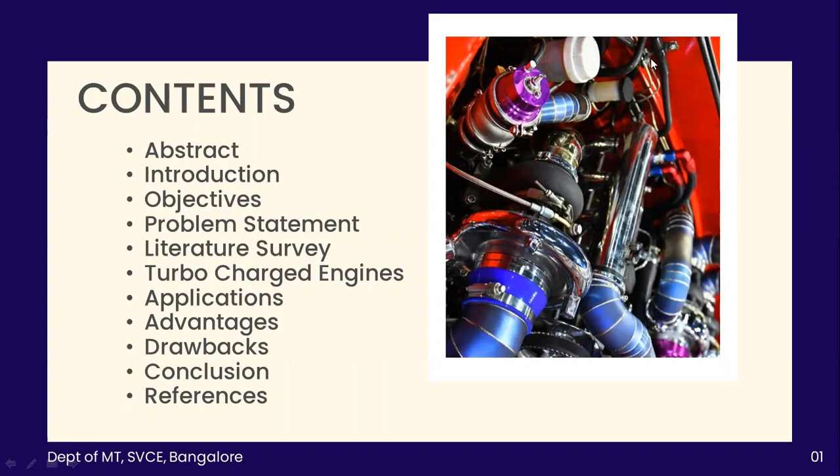First is the abstract. Turbocharged engines have become increasingly popular in the automotive industry due to their ability to increase horsepower and torque while also improving fuel efficiency. This seminar provides an overview of how turbochargers work and the different types of turbochargers, as well as their applications in high performance cars, trucks, and motorcycles, as well as in diesel engines.

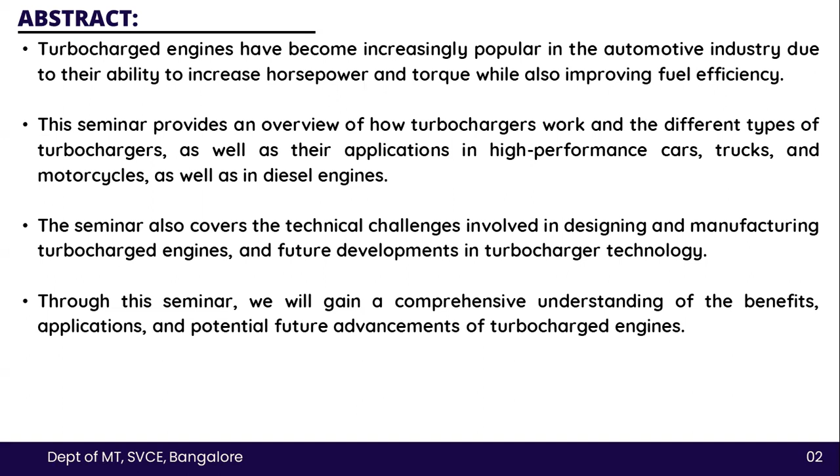The seminar also covers the technical challenges involved in designing and manufacturing turbocharged engines and future developments in turbocharger technology. Through this seminar, we will gain a comprehensive understanding of the benefits, applications, and potential future advancements of turbocharged engines.

Introduction to turbocharged engines. Turbocharged engines have become popular in the automotive industry due to their ability to increase engine performance while also improving the fuel efficiency. A turbocharger is a device that compresses the air that enters the engine, allowing it to burn more fuel and create more power. The result is increased horsepower and torque, as well as improved fuel economy.

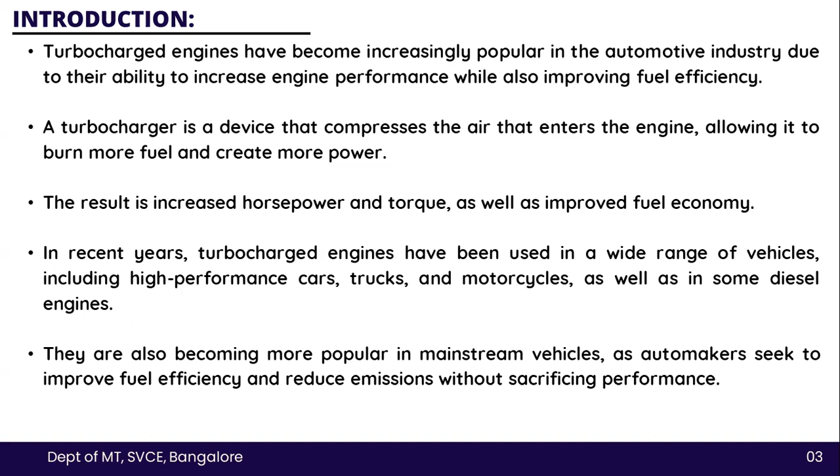In recent years, turbocharged engines have been used in a wide range of vehicles, including high performance cars, trucks, and motorcycles, as well as in some diesel engines. They are also becoming more popular in mainstream vehicles as automakers seek to improve fuel efficiency and reduce emissions without sacrificing performance. The objectives: to explain the basic components of a turbocharger and how it works to increase engine performance

and fuel efficiency. To provide an overview of the different types of turbochargers and their applications in various types of vehicles, including high performance cars, trucks, and motorcycles, as well as in diesel engines and emerging applications in mainstream vehicles. To highlight the advantages and disadvantages of using a turbocharged engine, including the technical challenges involved in designing and manufacturing them, such as heat management and durability.

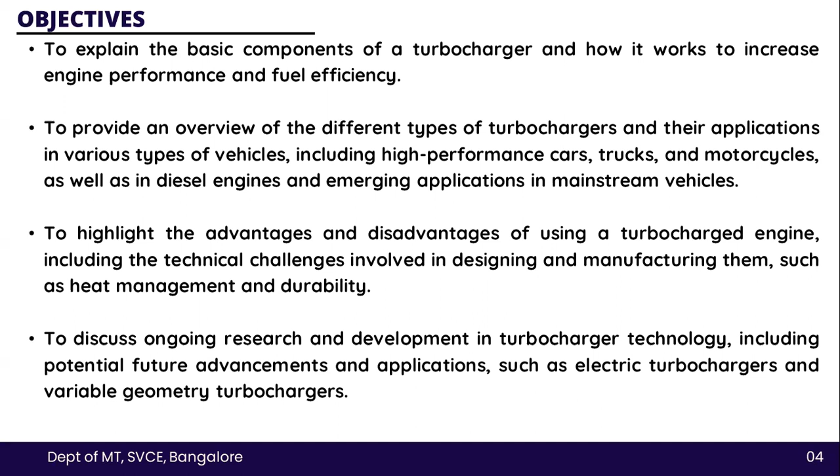To discuss ongoing research and development in turbocharger technology, including potential future advancements and applications, such as electric turbochargers and variable geometry turbochargers.

Now, what are the problem statements? So, while turbocharged engines offer many benefits such as increased horsepower and torque and improved fuel efficiency, they also present several technical challenges for the designers and manufacturers. These challenges include heat management, durability, and maintaining proper air to fuel ratios. Additionally, the increased complexity of turbocharged engines can make them more difficult and expensive to repair and maintain.

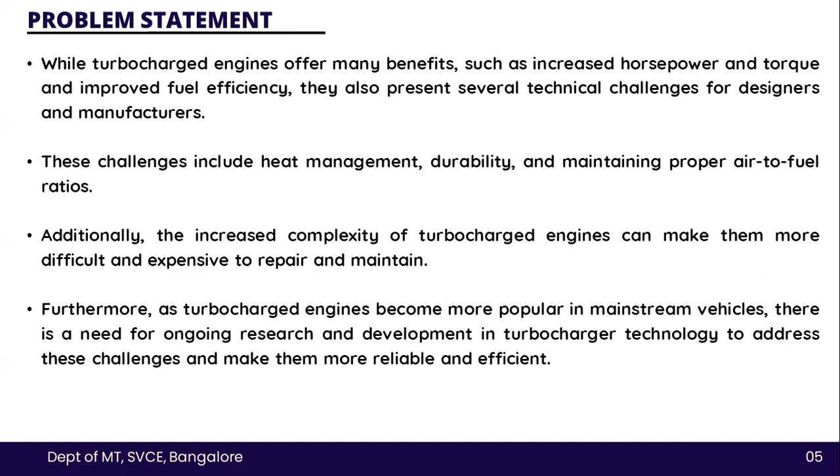Furthermore, as turbocharged engines have become more popular in mainstream vehicles, there is a need for ongoing research and development in turbocharger technology to address these challenges and make them reliable and efficient. These are the papers referred to in making the PPT on this topic.

The first paper is by the author M. A. El-Sayed. This paper was published in the year 2017. The title was given as A Review of Turbocharger Technologies. This paper provides a comprehensive review of the different types of turbocharger technologies, including fixed geometry, variable geometry, and electric turbochargers.

The second paper was published in the year 2018 by CM Baines and RWA Howlett. The title was given as Turbocharging the Gasoline Engine: Evolution or Revolution. This paper explores the history and current state of turbocharging in gasoline engines and discusses the challenges and opportunities for future developments.

The third paper was published in the year 2018 by SM Al Zubaidi, MY Hassan, and H.A. Aziz. The title was given as Turbocharger Matching for Engine Performance Improvement. This paper presents a method for optimizing the matching between a turbocharger and an engine in order to achieve maximum performance and efficiency.

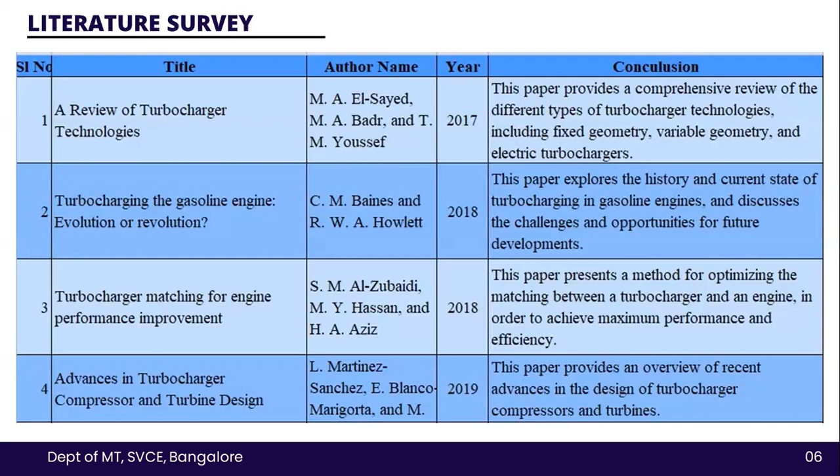Turbocharged engines. Turbocharged engines use a turbocharger to increase the amount of air that is delivered to the engine. The turbocharger is a device that uses exhaust gas energy to drive a compressor that forces more air into the engine cylinder. Turbocharged engines are widely used in a variety of applications, from passenger cars and trucks to high performance racing vehicles and heavy duty industrial equipment.

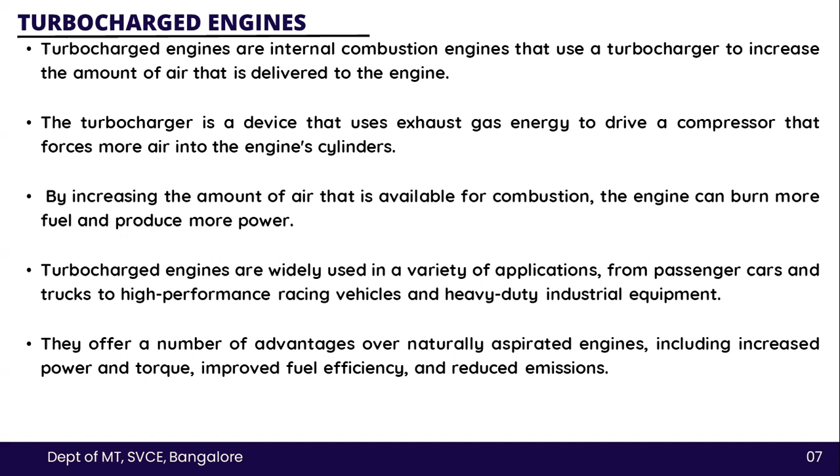Basically, turbocharged engines are internal combustion engines that use a turbocharger to increase the amount of air that is delivered to the engine. It can also be defined as a device that uses exhaust gas energy to drive a compressor that forces more air into the engine cylinder. By increasing the amount of air that is available for combustion, the engine can burn more fuel and produce more power.

Working of a turbocharged engine. The working principle of turbocharged engines can be seen with the use of a turbocharger, which is a device that utilizes exhaust gas energy to drive the compressor. The compressor forces more air into the engine cylinder, allowing for more fuel to be burned and more power to be produced.

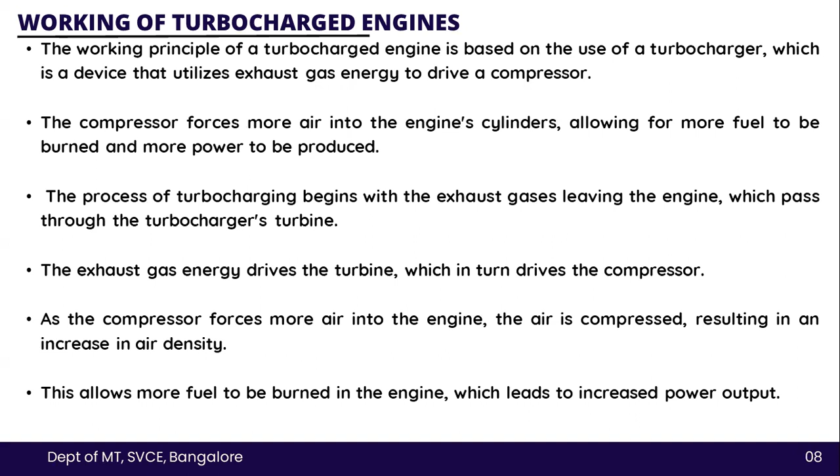The process of turbocharging begins with the exhaust gases leaving the engine, which pass through the turbocharger's turbine. The exhaust gas energy drives the turbine, which in turn drives the compressor. As the compressor moves, it forces more air into the engine; the air is compressed, resulting in an increase in air density. This allows more air and fuel to be burned in the engine, which leads to increased output.

So, as you can see, this is a video, and here it shows the working of a turbocharged engine. The compressor inlet is the inlet for the air to pass, and from the inlet it goes into the compressor discharge, where the discharge of the air is taking place, and the air cooler is set to cool the engine. The intake manifold of the turbocharged engine is seen here.

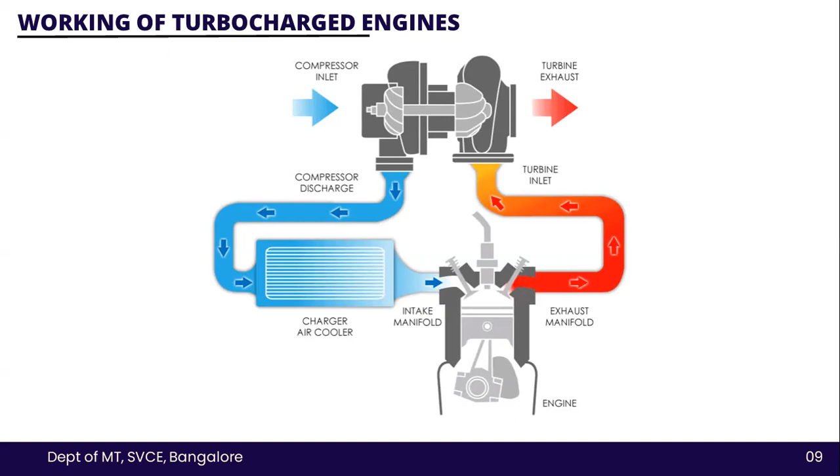While the valve opens, the air is pushed inside, and the exhaust manifold is the outlet air, and the exhaust turbine exhaust is the air outlet. The turbocharger operates at high speeds and temperatures and requires proper lubrication and cooling to ensure reliable and efficient operation. This is typically achieved through the use of engine oil and a dedicated cooling system.

One of the advantages of turbocharging is that it allows for smaller, more efficient engines to produce the same power as larger, naturally aspirated engines. This leads to improved fuel efficiency and reduced emissions as well as increased performance and acceleration.

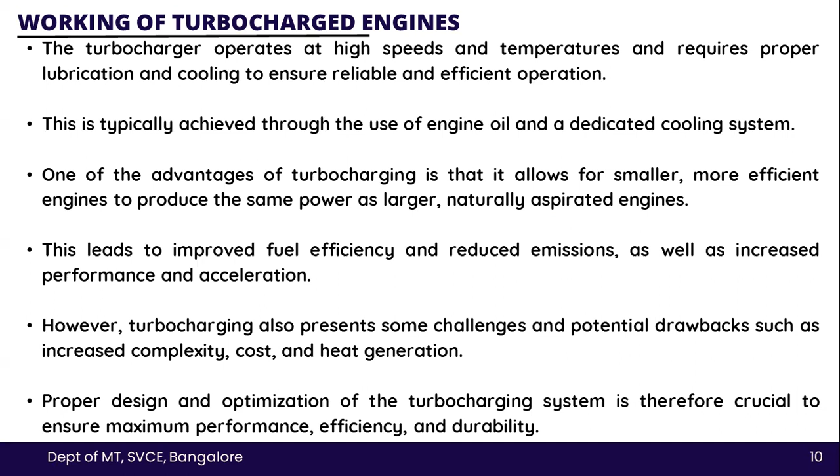However, turbocharging also presents some challenges and potential drawbacks, such as increased complexity, cost, and heat generation. Proper design and optimization of the turbocharging system is therefore crucial to ensure maximum performance, efficiency, and durability.

Now let's come to the components of a turbocharged engine. The first basic component of a turbocharged engine is a turbocharger. The turbocharger is the key component of the turbocharged engine, consisting of a turbine and a compressor that are connected by a shaft. Basically, the turbine is driven by exhaust gases from the engine, which in turn drives the compressor to deliver more air into the engine cylinder.

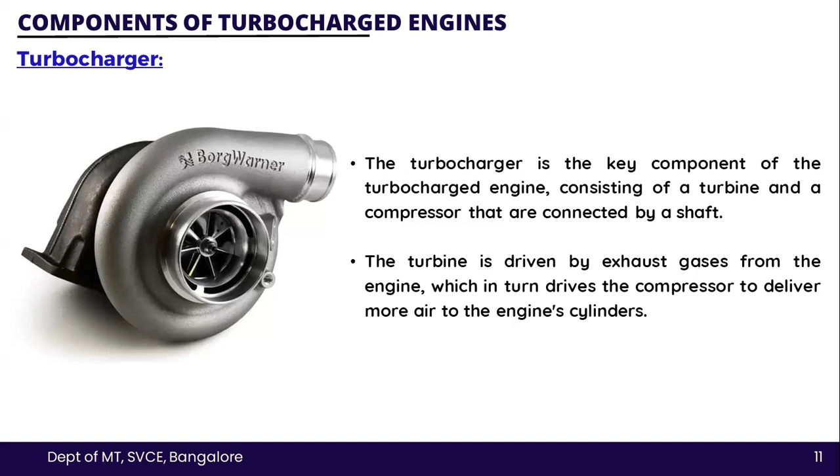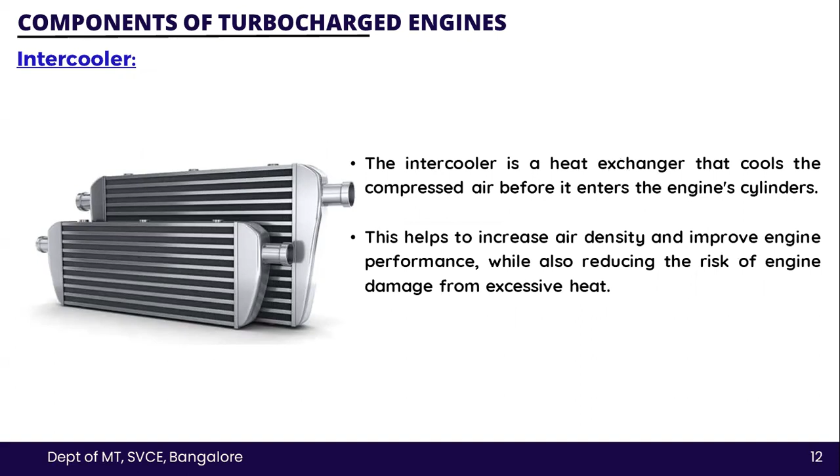The next component of the turbocharged engine is an intercooler. It is a heat exchanger that cools the compressed air before it enters the engine cylinders. This helps to increase air density and improve engine performance while also reducing the risk of engine damage from excessive heat.

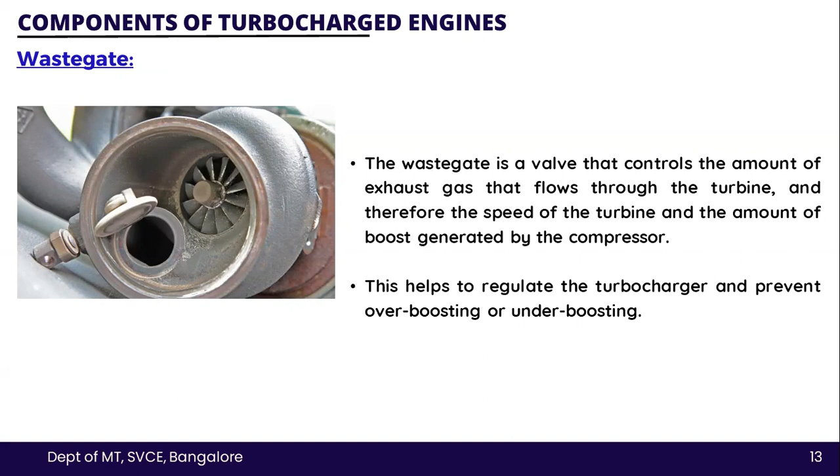Wastegate. The wastegate is a valve that controls the amount of exhaust gas that flows through the turbine, and therefore the speed of the turbine and the amount of boost generated by the compressor. This helps to regulate the turbocharger and prevent overboosting and underboosting.

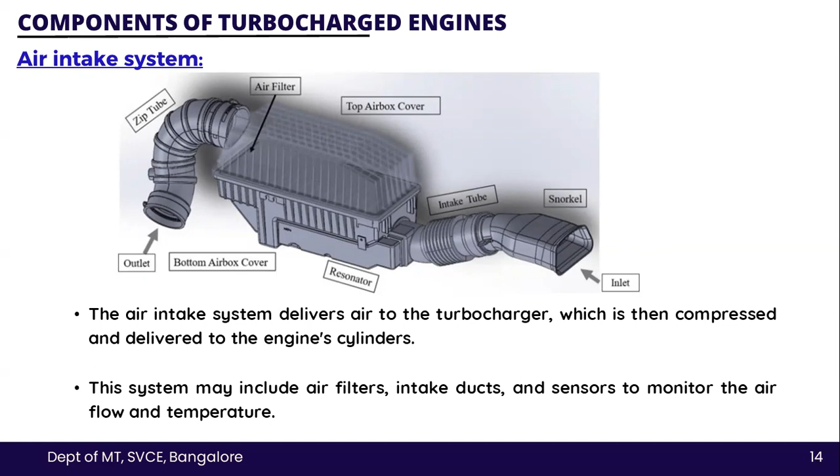Air intake system. The air intake system delivers air to the turbocharger, which is then compressed and delivered to the engine's cylinders. This system may include air filters, intake ducts, and sensors to monitor the air flow and temperature.

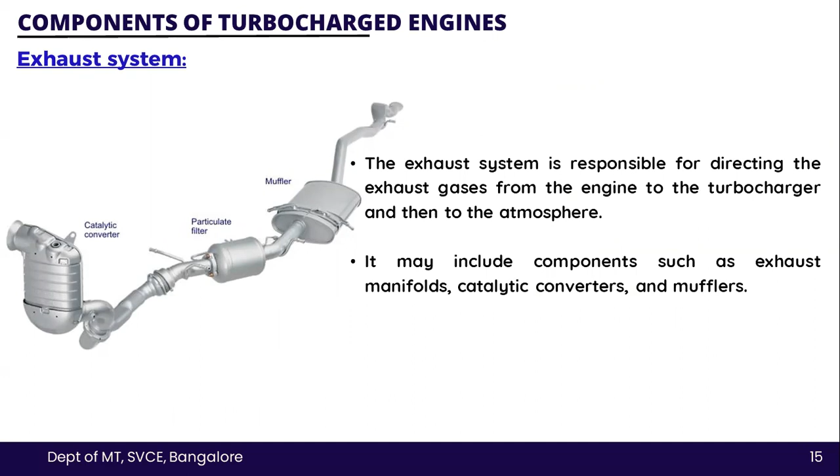Exhaust system. The exhaust system is responsible for directing the exhaust gases from the engine to the turbocharger and then to the atmosphere. It may include components such as exhaust manifolds, catalytic converters, and mufflers.

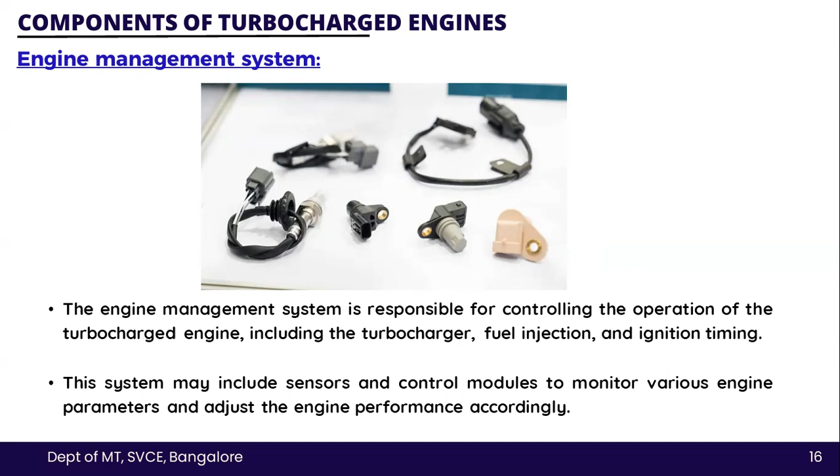Engine management system. The engine management system is responsible for controlling the operation of the turbocharged engine, including the turbocharger, fuel injection, and ignition timing. This system may include sensors and control modules to monitor various engine parameters and adjust the engine performance accordingly.

Now, let us see the types of turbocharged engines. The first is single turbo. A single turbo setup uses a single turbocharger to deliver increased airflow and power to the engine. This is the most common type of turbocharged engine as it is relatively simple and cost effective to implement. But single turbo setups may suffer from turbo lag and reduced performance at low engine speeds.

The next type is twin turbo. A twin turbo setup uses two turbochargers, usually of different sizes, to provide improved performance and responsiveness compared to a single turbo setup. By using two turbochargers, one can be optimized for low speed performance and the other for high speed performance, resulting in improved overall engine performance.

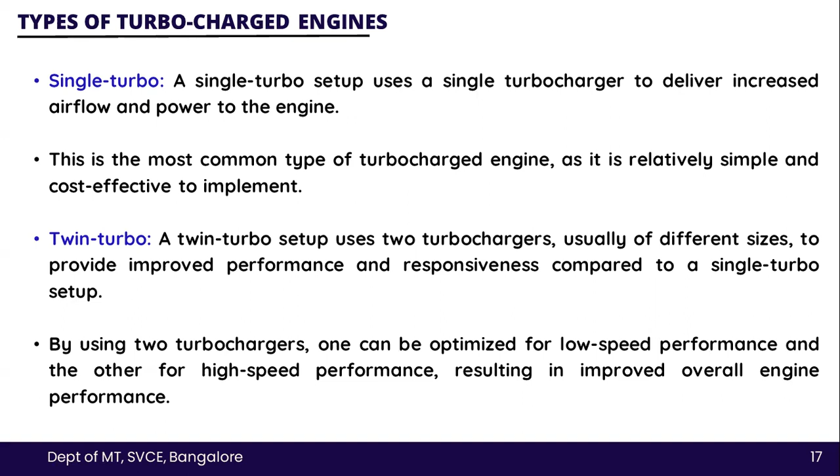The next one is sequential turbo. A sequential turbo uses two turbochargers, but they are used sequentially rather than in parallel. One turbocharger is typically smaller and optimized for low speed performance, while the other is optimized for high speed performance. The smaller turbocharger is used at low engine speeds to reduce turbo lag, and the larger turbocharger is activated at higher engine speeds to provide increased power and performance.

The next one is variable geometry turbo. A variable geometry turbo uses adjustable vanes in the housing to control the speed and flow of exhaust gases, allowing the turbocharger to provide optimal performance across a wide range of engine speeds. VGTs can provide improved responsiveness and reduced turbo lag compared to fixed geometry turbochargers, but they are typically more expensive and complex to implement.

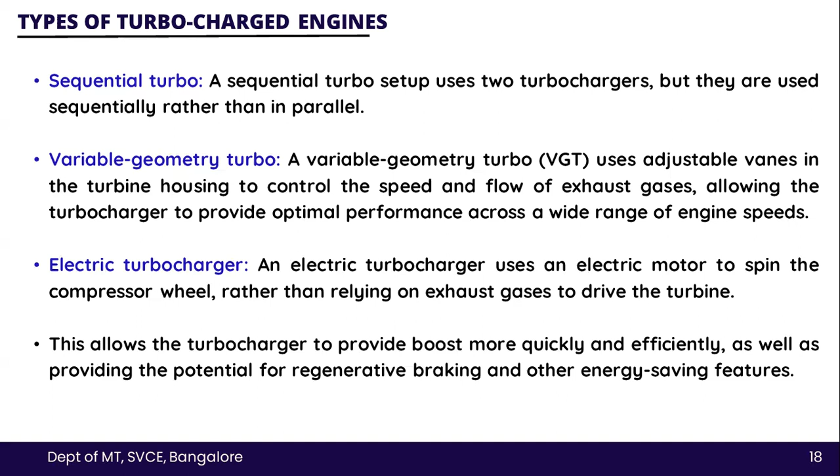Electric turbochargers are the next type of turbocharger. They are the recent type of turbochargers and modern technology usage. An electric turbocharger uses an electric motor to spin the compressor wheel rather than relying on exhaust gases to drive the turbine. This allows the turbocharger to provide boost more quickly and efficiently, as well as providing the potential for regenerative braking and other energy saving features.

Implementation of a turbocharger. The engine must be designed or modified to accommodate a turbocharger, including changes to the intake and exhaust system, fuel injection, and other components. Turbocharger selection. The appropriate type and size of turbocharger must be selected based on the engine's characteristics and performance goals.

Installation. The turbocharger and associated components must be installed in the engine, including the intercooler, wastegate, and boost controller. Tuning. The engine management system must be tuned to optimize the performance of the turbocharged engine, including adjustments to the fuel injection timing, ignition timing, and boost pressure.

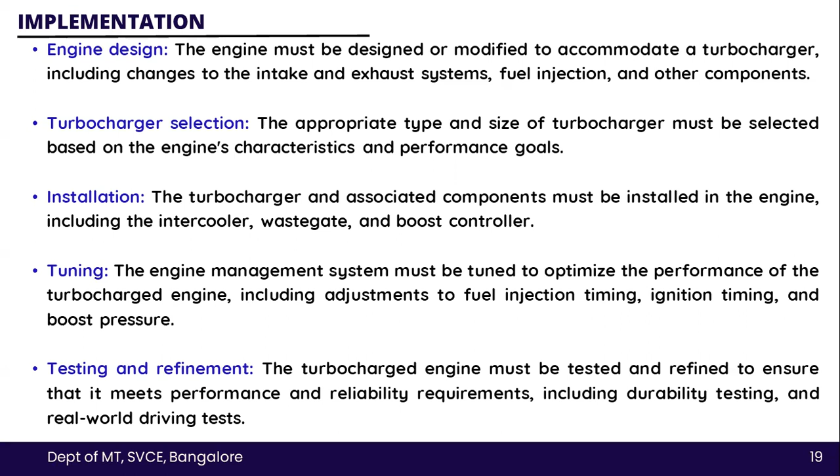Testing and refinement. The turbocharged engine must be tested and refined to ensure that it meets performance and reliability requirements, including durability testing and real world driving tests. These are some of the applications of the turbocharged engine. They are used in high performance cars.

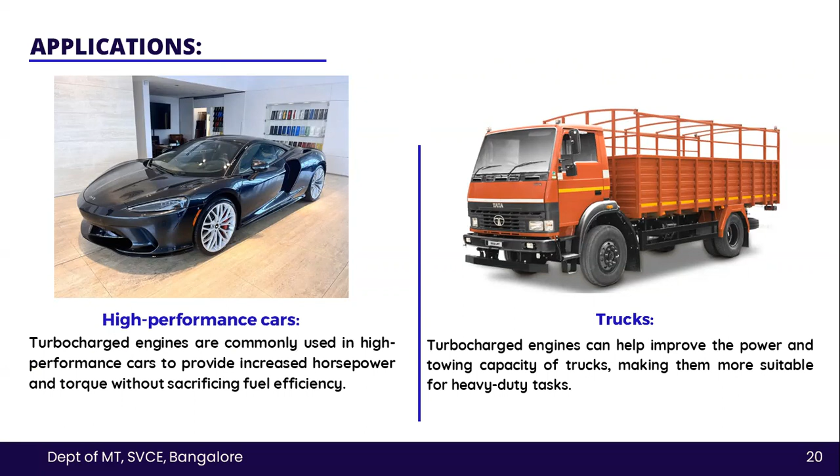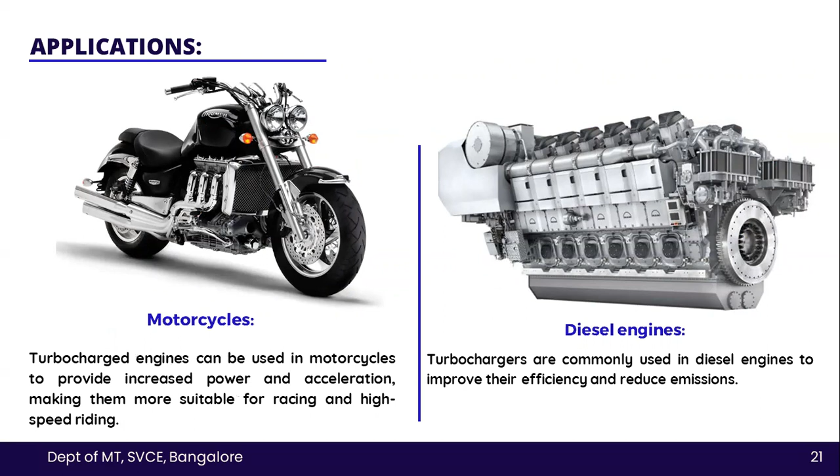Turbocharged engines are commonly used in high performance cars to provide increased horsepower and torque without sacrificing fuel efficiency. Turbocharged engines can help improve the power and towing capacity of trucks, making them more suitable for heavy duty tasks. They are also used in motorcycles to provide increased power and acceleration, making them more suitable for racing and high speed riding. They are used in diesel engines as well to improve their efficiency and reduce emissions.

They are also used in mainstream vehicles as automakers seek to improve fuel efficiency and reduce emissions. Turbocharged engines are becoming more common as a way to boost engine power while still achieving higher fuel economy. They are also used in hybrid cars to help boost their performance and reduce emissions by providing additional power to supplement the electric motor.

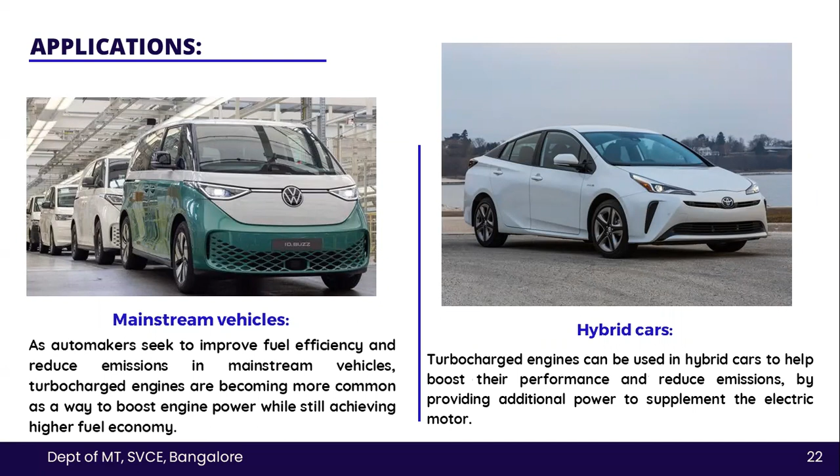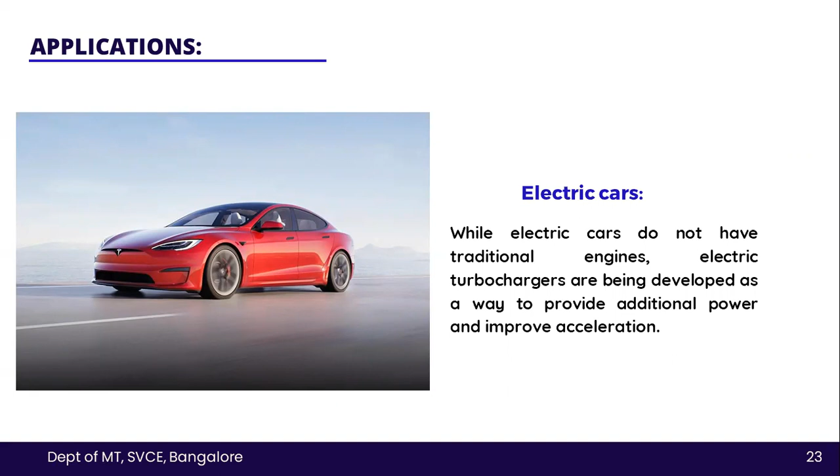Electric cars. While electric cars do not have traditional engines, electric turbochargers are being developed as a way to provide additional power and improve acceleration. Advantages of a turbocharger: increased horsepower and torque. They provide more power per unit of engine displacement, resulting in increased horsepower and torque.

Improved fuel efficiency. Turbocharged engines can achieve better fuel efficiency compared to naturally aspirated engines of similar size due to the increased air intake and combustion efficiency. Reduced emissions. By improving combustion efficiency, turbocharged engines can also help reduce emissions, particularly in diesel engines where emissions regulations are more stringent. Enhanced driving experience.

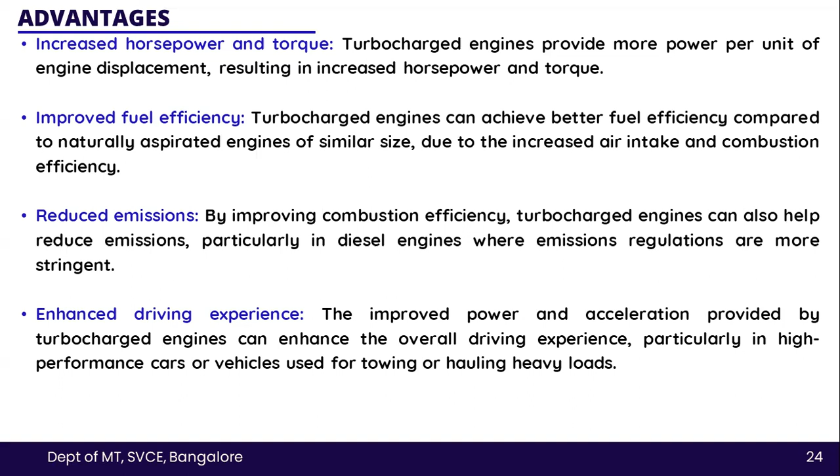The improved power and acceleration provided by turbocharged engines can enhance the overall driving experience, particularly in high performance cars or vehicles used for towing or hauling heavy loads. These are some of the drawbacks of a turbocharged engine. Increased cost, as turbocharged engines are more expensive to design, manufacture, and repair than naturally aspirated engines due to their added complexity and higher precision components.

Increased heat. Turbochargers generate a lot of heat, which can cause problems with engine cooling and potentially lead to engine damage if not managed properly. Increased stress on engine components. The increased power and torque provided by turbocharged engines can place additional stress on engine components, leading to increased wear and tear and potentially reducing engine longevity.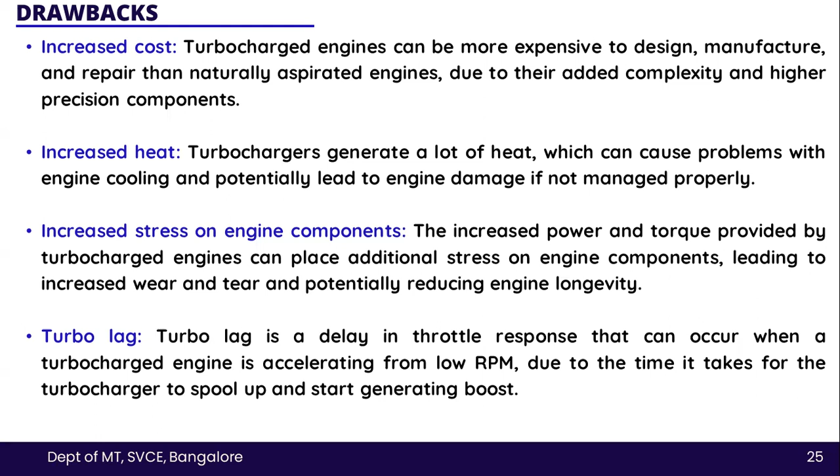Turbo lag. Turbo lag is a delay in throttle response that can occur when a turbocharged engine is accelerating from low RPM due to the time it takes for the turbocharger to spool up and start generating boost. Future directions: electrification. Hybrid and electric powertrains are becoming increasingly common, and turbocharging may play a role in improving their performance and efficiency. Advanced materials.

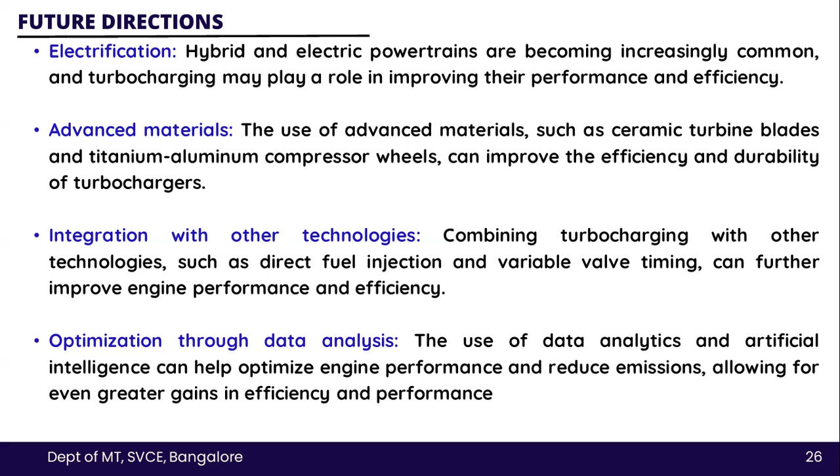The use of advanced materials such as ceramic turbine blades and titanium aluminum compressor wheels can improve the efficiency and durability of turbochargers. Integration with other technologies. Combining turbocharging with other technologies such as direct fuel injection and variable valve timing can further improve engine performance and efficiency. Optimization through data analysis. The use of data analytics and artificial intelligence can help optimize engine performance and reduce emissions, allowing for even greater gains in efficiency and performance.

Conclusion. In conclusion, turbocharged engines offer a number of advantages over naturally aspirated engines, including increased power output, improved fuel efficiency, and reduced emissions. While there are drawbacks to turbocharging, such as increased complexity and cost, the benefits are significant, particularly in high performance applications.

The success of turbocharging in the automotive industry has led to ongoing research and development aimed at improving its performance, efficiency, and reliability. Future directions for turbocharged engine technology include the use of advanced materials, integration with other technologies, and optimization through data analysis. Overall, turbocharged engines represent a significant technological advancement in the automotive industry and are likely to continue to play an important role in improving engine performance, efficiency, and sustainability in the years to come.